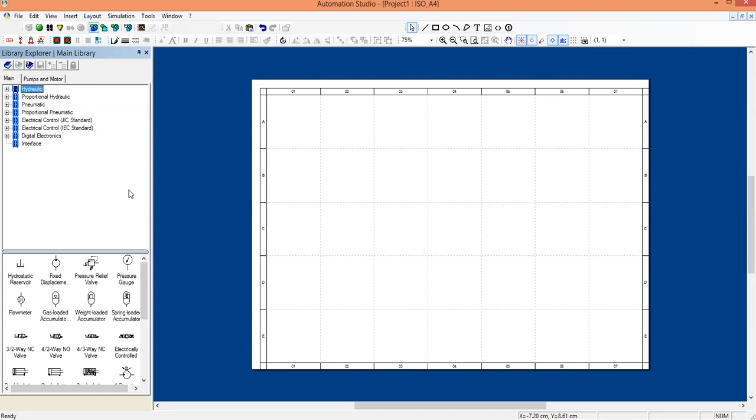Welcome all. In this video, we will see how to design a pneumatic circuit for automatic extension and retraction of a double acting cylinder. So we will place all the basic components similar to our previous exercises. So for a double acting cylinder, we need a compressor, and then we need an FRL unit.

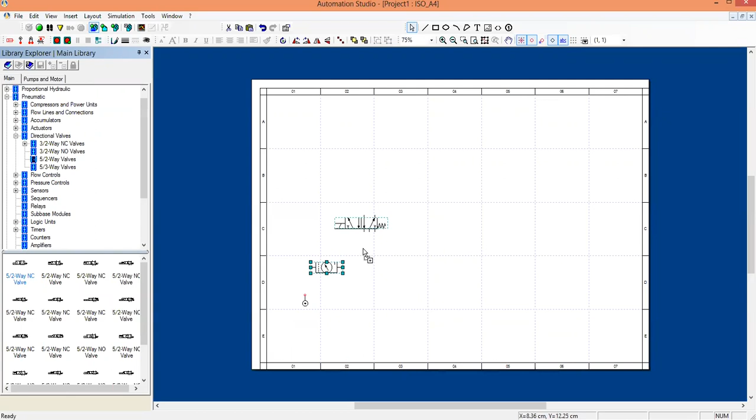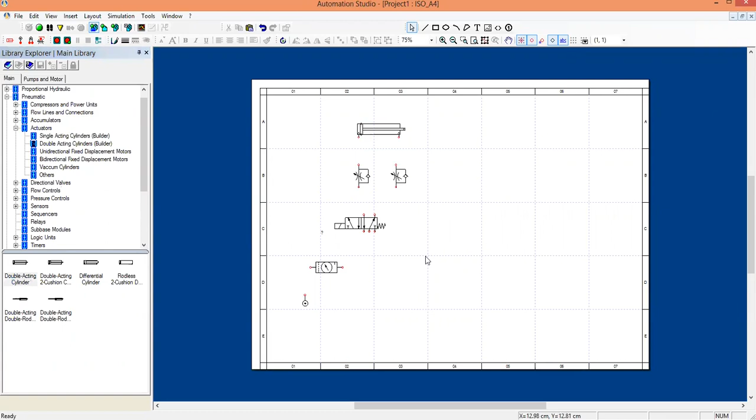We need direction control valves, and then I need a flow control valve. Since it's a double acting cylinder, we need two flow control valves. Finally, a double acting cylinder. So we can attach this flow control valve directly to the cylinder.

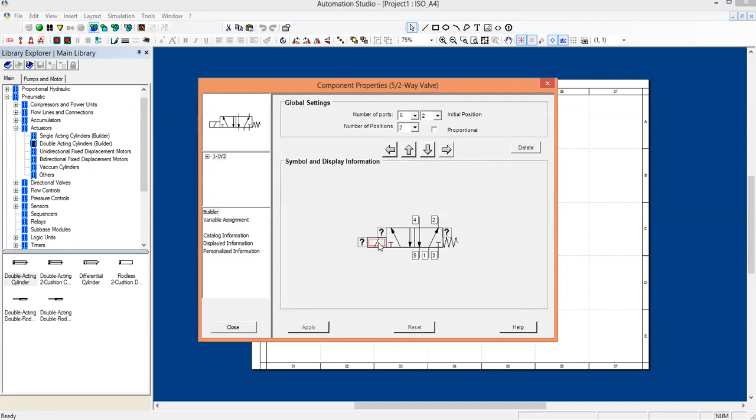Now we have to change the mode of actuation. So here we have solenoid operated. For a pure pneumatic automation, we need to go for pilot operated. If you use solenoid, it becomes electro-pneumatic. So for pure pneumatic operation, we can go for pilot operated.

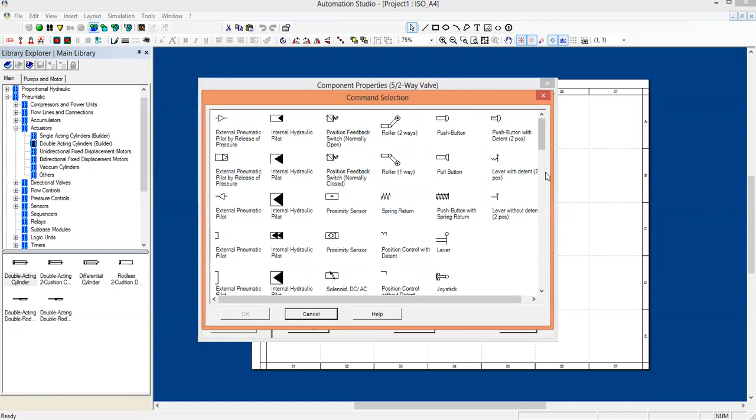So here we can see internal pilot, external pilot, etc. So I'm going to use external pilot. Similarly, this side also, we have to change the method of actuation to external pilot. Just give apply and then we can close it. Okay. Now we'll first give all the basic connections.

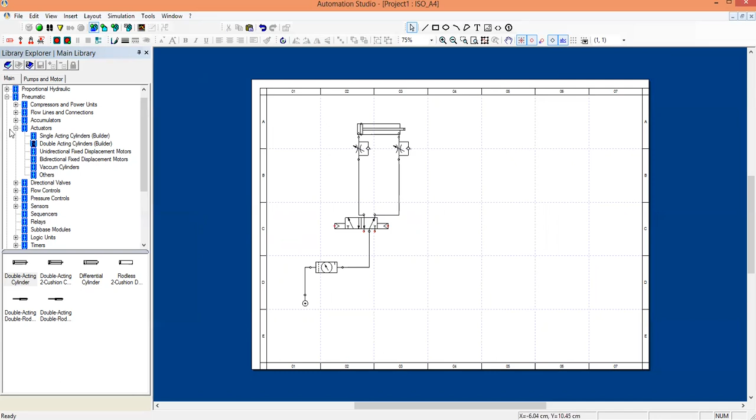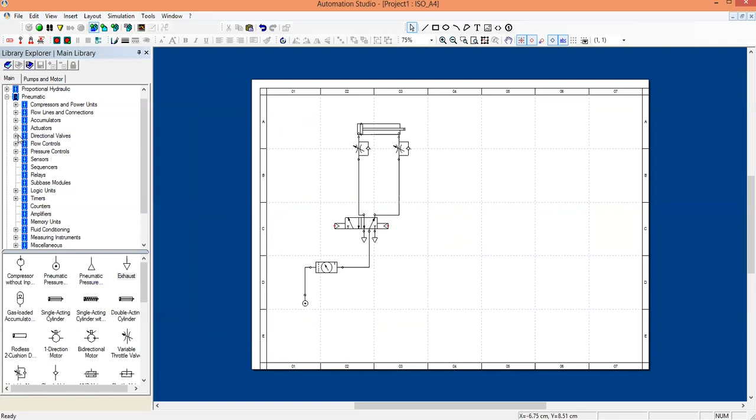Okay, the circuit is automatic extension and retraction of a double acting cylinder. So my system should know when your cylinder has completely extended or when it has completely retracted. So I need two limit valves here. A limit valve is nothing but a normal 3/2 direction control valve but roller operated.

So just select a 3/2 DC valve, double click on it and then change the method of actuation to roller. Here you have roller operated. Just give apply and close it. I want to rotate it because I want to place it vertically. So you can click the valve and here you have an icon, right rotation. Just click this. You can transform the orientation of the valve.

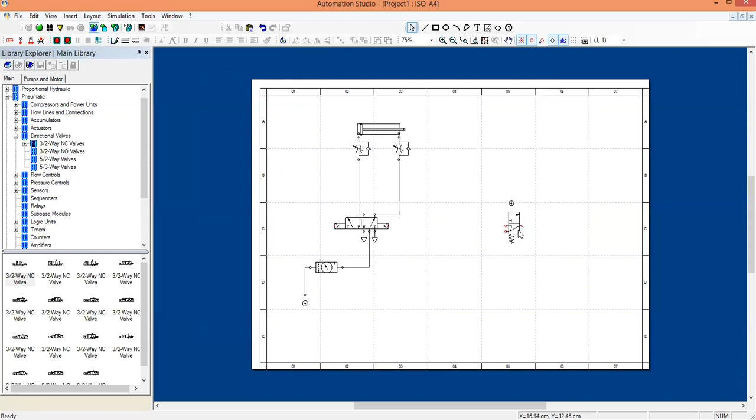Now again, I'm going to copy this and paste it because I need one more valve. One to detect whether it has completely extended and the other one to detect whether it has completely retracted or not. Okay. Now if you see, the valve has a diamond shape here at the top and your cylinder will also have a diamond shape. Both these diamonds should coincide, then only your valve will detect the retraction of the cylinder.

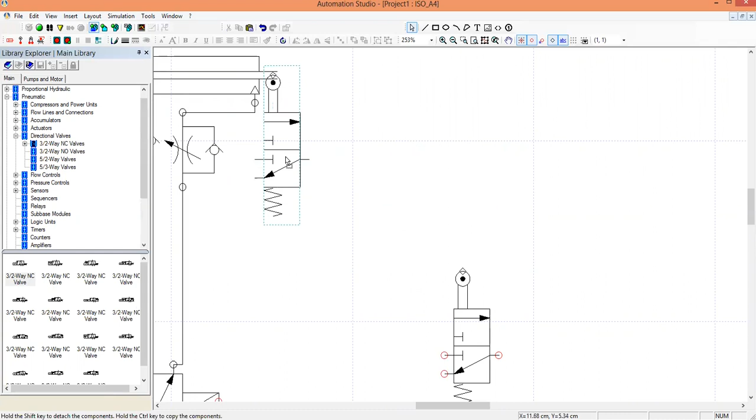So I want to place my valve here. If I place this, it will just disturb this flow control valve. So what I'm going to do is I'm just going to drag this flow control valve and move it here. Okay. Now I can place this valve here. So the diamond of the valve coincides with the diamond of the cylinder. Now the other valve should be placed in a position where the cylinder completely extends.

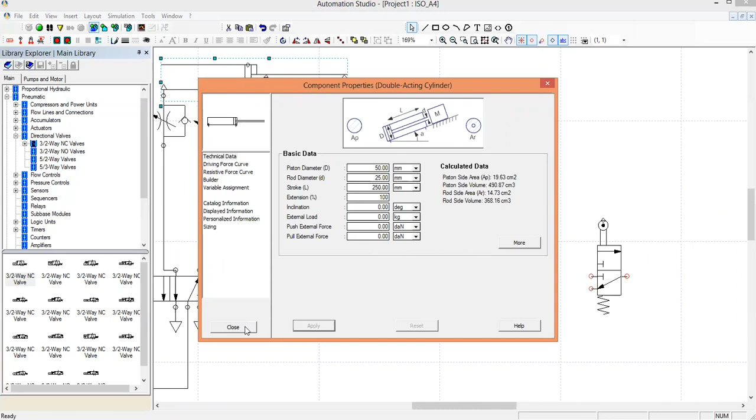To know that, we can just double click on the cylinder and here you can see something called technical data. Just click it and under technical data we have extension percentage. Here you can change that to 100 and then give apply and close it. So the cylinder extends completely to the final position, that is 100% extension. Now I can place the valve such that both the diamonds coincide. Again double click the cylinder and then bring the cylinder to the initial position. Okay.

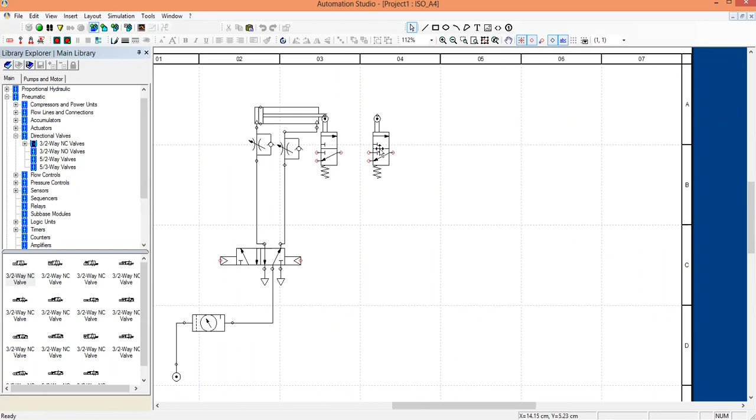Now for these valves I have to give compressors and exhaust. So I can go to pneumatic. I'm going to give a separate compressor for each valve. And then a separate exhaust. So I'm using separate compressors just to avoid clumsiness in the connections.

Okay. Now we have to make the connection such that when the cylinder extends, it has to retract back. When it retracts, it has to extend again. So the output of retraction has to be connected with extension. So this is the output of retraction. This has to be connected with the extension part of the valve. Similarly, this has to be connected

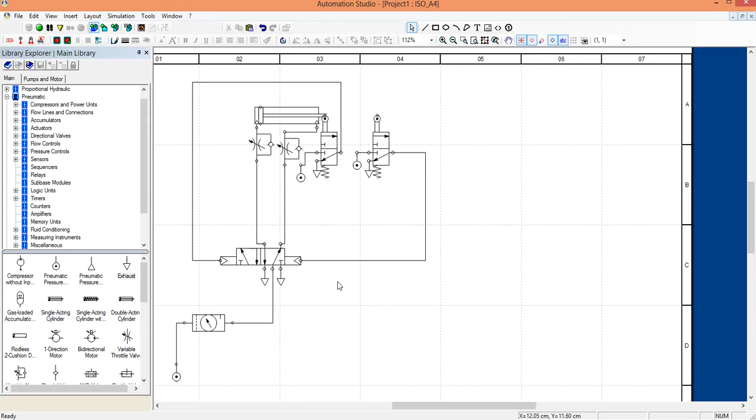here. Now we will just try to simulate this. So the cylinder automatically extends and retracts. So this is the automatic extension and retraction of a double acting cylinder.